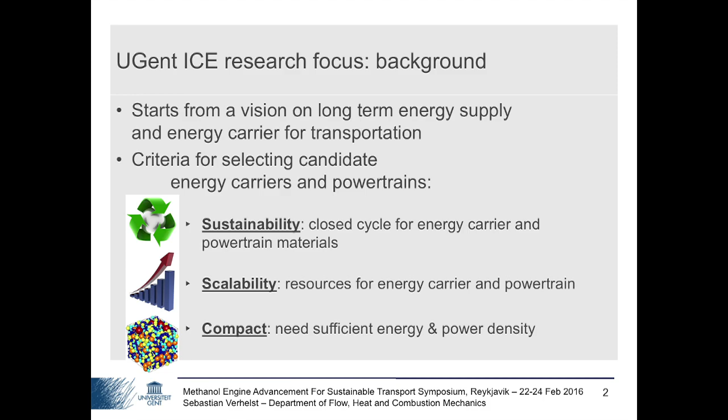That in itself obviously is not enough. We think a very important one that's often missing in a lot of studies is scalability. So if you think about the current challenge for transportation, worldwide we're talking about over 1 billion vehicles these days, so a tremendous challenge. So you always have to weigh your probable or possible alternative against scalability.

Look at the resources that you need, for instance, to produce your energy carrier. Look at the resources that you need to produce the powertrain. Can you scale that up to those huge numbers? If you have to rely on a scarce resource, there's a no-go there. So scalability is also a very important issue.

And then third, of course, there are a lot of other criteria, but this is the base set we started out with. We're talking about transportation, so we need the energy carrier to have high energy density. We need the powertrain to have high power density in order to power transportation. So taking these three criteria, what did we end up with in terms of truly sustainable transportation?

We think the answer lies in obviously renewable things, but renewable fuels, and preferably liquid fuels. So renewable could be from solar. That's our main sustainable energy source in the long run. Of course, it depends on where you are around the world, what you're going to rely on exactly. But so say solar fuels, liquid electricity, as we've already heard mentioned.

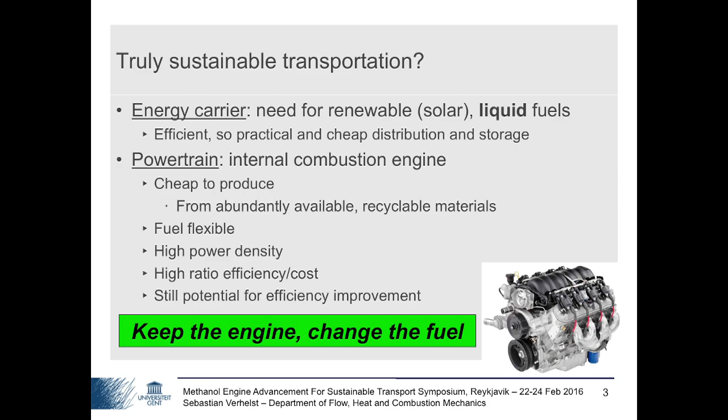So what about that fuel? Well, we've heard a number of times today the case for methanol being presented. So I'll just quickly go through this, not going into any detail here. We've heard that methanol is a very versatile energy carrier, can be produced in different ways. So although it's primarily being produced from fossil fuels as of today, there are also routes based on biomass, based on wastes, and ultimately, in the long run, of course, a really attractive option is to synthesize it using renewable energy, where you see possible schemes depicted over there.

And again, reiterating that it's liquid. So you can rely on cheap tanks that you can place anywhere you like, for instance, in a vessel. You have a cheap way of distributing this energy carrier. Also very interesting is the fact that it's not only miscible with gasoline, it's also miscible with ethanol, which used to be the most prevalent alternative fuel for passenger cars until it was passed by methanol actually recently.

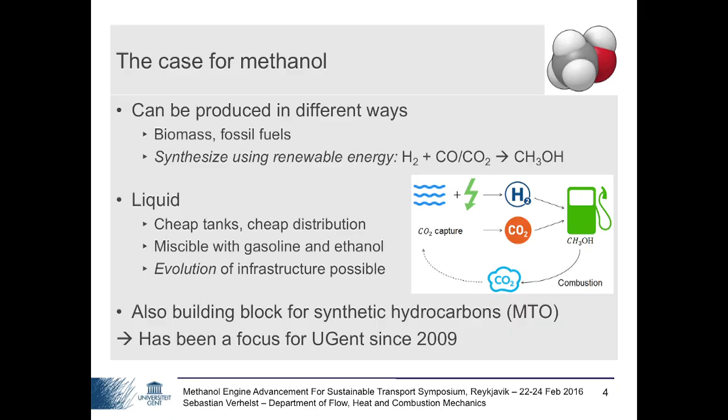And those two things combined mean that you can really work on an evolution of the infrastructure. We were relying on a liquid fuel infrastructure. Right now we're using a number of fuels already. So we have inroads to start introducing methanol. And options like these GEM fuels mean that you have drop-in fuels, that you have vehicles out there that are already able to take on this methanol-containing fuel.

It doesn't stop at being a fuel. It also serves as a building block for more complex hydrocarbons through the methanol to olefins process. So it's really a compound that can serve a lot of needs, which I hope explains why this has been a focus fuel for us since 2009.

And it's really heartwarming to see this big show up, and thank you again for being invited. It's really nice coming from 2009 and having the feeling a bit of being a lone warrior in, at that time, the methanol engine world, and having to explain myself everywhere I went why on Earth we would be looking at methanol, up to this moment where every 3 or 4 months there's a new gathering around methanol engines. So that's a really good thing.

So coming now to the actual topic of this presentation, methanol as an engine fuel. We've already heard a number of methanol properties being really interesting as engine properties. Much of the differences compared to gasoline are determined by methanol's polarity. So just a few examples here. The higher heat of vaporization, for instance, we're talking about 3 times as much for methanol compared to gasoline on a mass basis, and this is amplified in the engine because of the reduced air-to-fuel ratio.

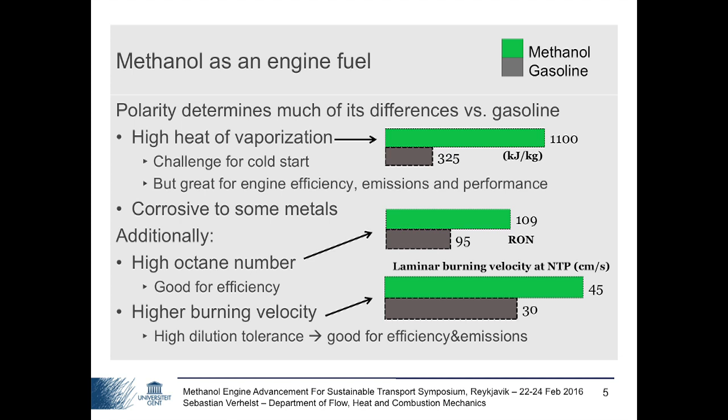But also that usually means that you have more tolerance to dilution. So you can go to lean operation, you can start blending in exhaust gas with the fresh mass, which both mean, again, that you're doing good things for the efficiency and you're lowering temperatures, so you're doing good things for NOx emissions.

So we did a number of measurements. First of all, we wanted to find out the potential in what you could call the world standard gasoline engine, which is still, as of today, the port fuel injected gasoline engine. So what happens if you convert such an engine to allow alcohol operation or methanol operation? We converted 2 engines and started measuring just with a simple conversion what we got in terms of efficiency.

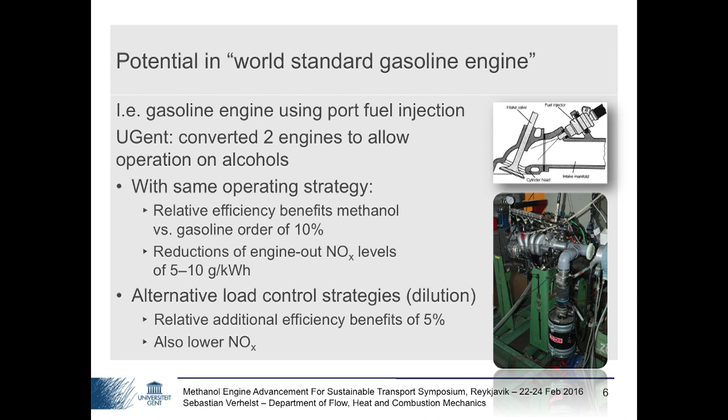While using the same operating strategy as the baseline gasoline engine, we already obtained relative efficiency benefits of methanol versus gasoline of the order of 10%. And more importantly, perhaps, reductions of engine out NOx levels of the order of 5 to 10 grams per kilowatt hour engine out.

If you take advantage of the increased dilution tolerance of methanol compared to gasoline and start pushing a bit more, just playing around with the software, so same hardware, but playing around with strategies, that allows you to get relative additional benefits of the efficiency of the order of 5%, and again, you end up with lower NOx emissions. So that's for the port fuel injected base gasoline engine.

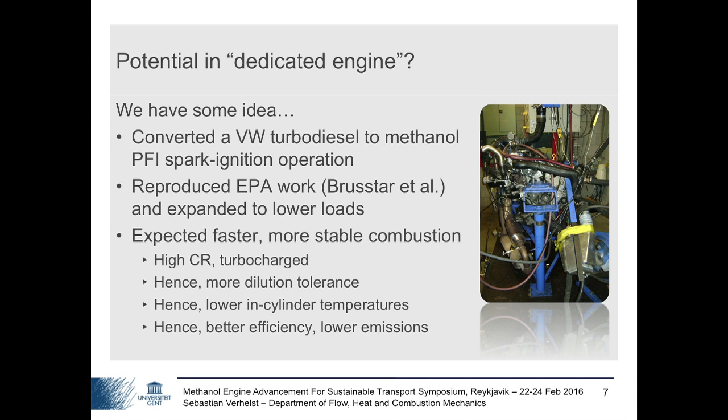What would be the potential in a dedicated engine, an engine that makes better use of these particular properties of methanol? We have some idea. There's still a lot of work to do there, but what we did was, while taking inspiration from work at EPA by Matt Brusstar, to convert a VW turbo diesel to methanol port fuel injected spark ignition operation. So we took out the diesel injectors, replaced them with spark plugs, mounted methanol injectors in the intake manifolds, and that was pretty much it.

So we didn't touch the compression ratio, it remained at the original 19.5 to 1, didn't touch the turbocharger. And so we first of all wanted to reproduce the EPA work because we were quite impressed with the numbers they were getting, but we also wanted to expand that to lower loads, because we then wanted to use the measurement results to feed into vehicle driving cycle simulations.

So why would this engine make better use of methanol's properties? Well, we expected a faster and more stable combustion for the high dilution strategies, because it's, as I've said, a high compression ratio engine, turbocharged. So overall temperature levels are higher, which should boost the tolerance for dilution. And overall peak temperatures would be lowered as a result of that, and we were hoping for better efficiency and lower emissions. So what did we get?

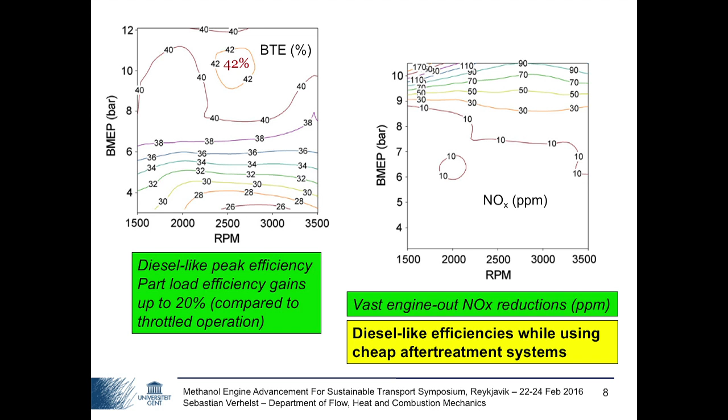So the bottom line here is that you can obtain diesel-like efficiencies while using cheap after-treatment systems, because this engine is still operating at lambda 1, but using EGR. So 42% in itself perhaps isn't as impressive as the numbers you've already seen from Martin, but remember, this is a really straightforward, low-cost conversion, not much optimization going on, and already you're attaining the same or even higher efficiencies as the baseline diesel. So that's an important message, I think.

So what's the potential in state-of-the-art gasoline engines?

We've talked about PFI engines. What about if you go and look at direct injected engines? Well, we cooperated with the Argonne National Lab in Chicago. We tested their DI, naturally aspirated engine in the lab, on methanol, on gasoline, on ethanol, butanol, E85 and M56. You might remember that this M56 blend is a binary blend that ends up having the same air-to-fuel ratio as an E85, which means that this is a fuel you could potentially introduce in a flex fuel vehicle without the engine control unit realizing that it's not operating on E85 but actually on M56.

We did use the stock ECU, which meant we had some load limitations because of the lower heating value of methanol. You have to have longer injection durations for a certain power output. So there were some limitations there, but still at low to mid loads we recorded a 2.7 percentage point efficiency increase on methanol versus gasoline, and this increased at high load where you can really make use of the higher knocking resistance of methanol, and in the end we obtained a peak efficiency there of 40%, which given the baseline engine again was quite impressive, and combined with the carbon to hydrogen ratio of methanol translates to a 20% reduction in CO2 numbers compared to the baseline gasoline engine.

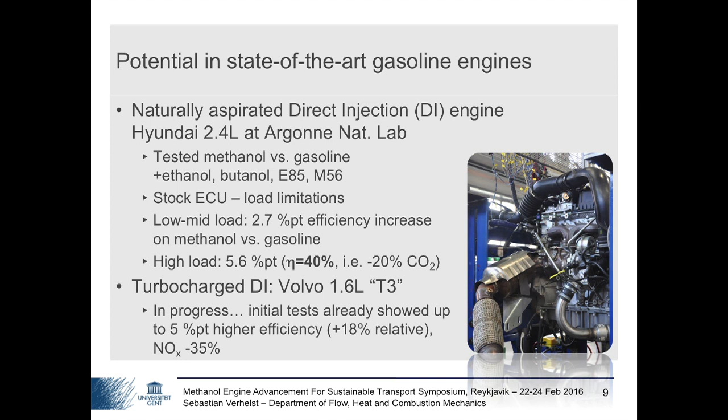We've also just started picking up on the idea that was already briefly presented by Leslie Bromberg from MIT, this fuel reforming using exhaust heat. So methanol is a compound that's very suitable for exhaust energy recovery. So reminding you of the idea, if you look at your methanol tank there, what you could do is make use of your exhaust heat to reform your methanol and end up with a hydrogen-rich gas that has a higher heating value than the methanol you started with, because it's an endothermic reaction. So you make use of the heat that would otherwise be wasted.

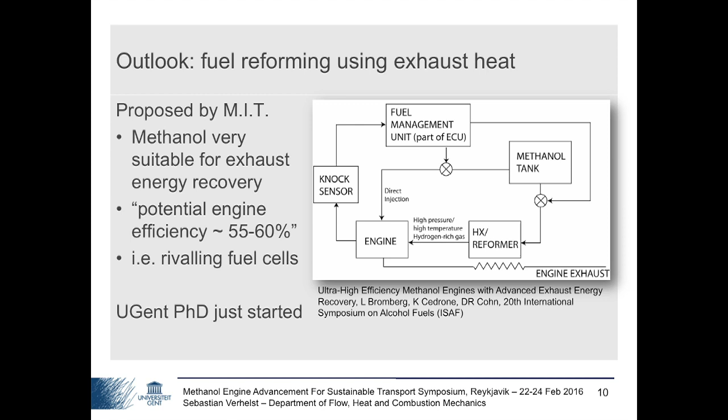And not only that, because it's a hydrogen-rich gas, you can further push these dilution strategies. You can go to leaner mixtures or to higher EGR rates, for instance. So there's a potential for pretty high efficiencies. I'm just reminding you of the figures that Leslie was talking about. So really appealing figures, I would say, which is a justification for a PhD that was just started at Gent, where we are going to try to actually build this thing and see whether we can come up indeed with these efficiency numbers. So I've been talking about SI engines now.

What about diesel engines? We've also recently started work. And Josef already mentioned the Lean Ships project this morning. It's a Horizon 2020 project sponsored within the Mobility for Growth pillar, which is aimed at lowering the energy use and the emissions emitted by the shipping sector. It's a relatively big project involving 46 partners and 8 demonstrator platforms. And one of these 8 demonstrator platforms is called Demonstrating the Potential of Methanol as an Alternative Fuel, which includes 6 partners. So ourselves are leading the work package. We have 2 shipyards involved. We have an engine supplier involved, ship owner, and Methanex is also involved as a methanol producer and supplier.

The main work will be to convert a high-speed marine diesel engine to dual fuel operation with methanol. So making use of a pilot injection of diesel to serve as an ignition source and trying to increase the energy share of methanol as much as possible, methanol being introduced in the port. We've also just heard that this might not be the best approach in terms of efficiency or efficiency versus emissions trade-off. We're fully aware of that. The reason we chose this type of technology is first of all because we want to be able to offer a retrofit solution. We've heard about the importance of that in the shipping industry, and we also want to lower the thresholds of acceptance of possible ship owners, because using this option, you could revert back to 100% diesel operation if you would have any issues with the methanol system.

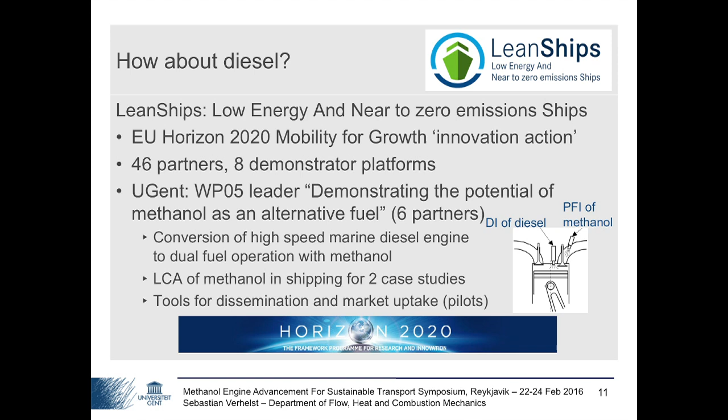So it's more from the viewpoint of acceptance and introduction in the market that we've picked this technology. We're going to include a life cycle assessment of methanol in shipping for 2 case studies that we've selected to make it a bit more concrete, to come up with actual numbers, to try to convince people at the end of the project, because this is also a part of that, to hopefully take this up and hopefully translate this to a number of actual pilots.

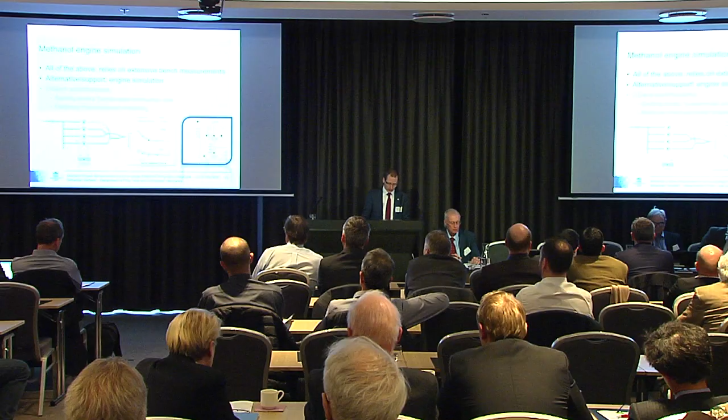Then finally, I've been mostly talking about our experimental work. I just want to share a few words with you on our simulation work. All of these tests that I've just been mentioning obviously rely on extensive bench measurements. The alternative, or at least the part of the replacement of that, could be through engine simulation. So we've been working on supplying a number of building blocks, some fundamental combustion data on methanol and methanol blends, and we've been using these building blocks in so-called multizone thermodynamic modeling. So it's getting a bit technical now, but bear with me.

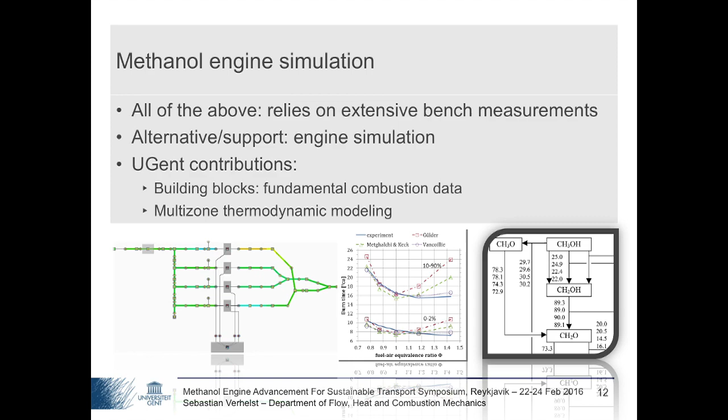So what I mean with building blocks are, on the one hand, for instance, the laminar burning velocity, the fundamental burning velocity of methanol containing mixtures. It sort of groups the chemical effects on combustion, so it's a convenient way of including the combustion properties in any engine simulation. We calculated this laminar burning velocity using a selected chemical kinetics scheme, and then built a correlation that allowed easy use in an engine code, and then went on to validate this through measurements.

On the top right, you see a picture of the flat flame burner at Lund University, where we measured a number of mixtures' burning velocity to validate the correlation, and beneath that you see a spherically expanding flame, which is measurements we did in cooperation with Leeds University. And we did this for pure methanol as well as methanol mixtures. So these GEM blends, we know also how to model them.

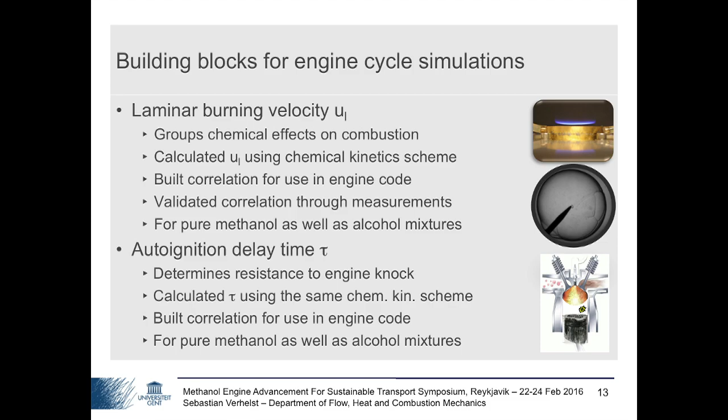Another important property is the auto-ignition delay time, which determines the resistance to engine knock, so it's important to get right. Pretty similar story as with the laminar burning velocity. We did a lot of calculations to build a correlation for use in engine code, and did that for pure methanol as well as these GEM blends or other alcohol mixtures in general.

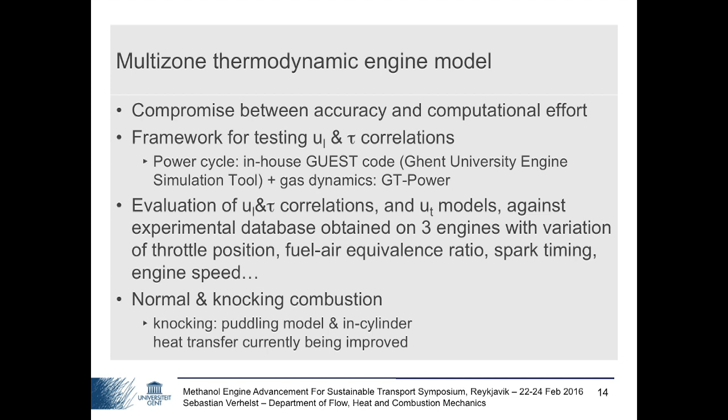And then we looked at multizone thermodynamic engine models, which are sort of a compromise between you want accuracy, but you don't want too much computational effort if you want to use a code to really optimize engines for a different fuel, so for methanol in this case. So we use this as a framework for testing our correlations, where we used our in-house code to calculate through the power cycle, and then used the commercial code to include the gas dynamics.

We evaluated these correlations as well as models for turbulent combustion velocity, and actually the whole experimental campaign I started out with was done to serve as a database for our modeling efforts, but luckily they turned out to be interesting in their own right. But that means that we ended up with a quite extensive database with variations of different engine parameters, and it allowed us to validate these correlations. So we looked at normal as well as knocking combustion, where for improved predictions for knocking combustion, we're still working on improving the puddling model as well as in-cylinder heat transfer.

So to conclude, I think the case for methanol as an energy carrier has been made, but additionally, methanol is a great engine fuel. It allows increased performance, increased efficiency, and decreased emissions. So actually you end up with the potential for efficiencies exceeding those of diesel engines, with the low emissions of gasoline engines, and with greater performance than both.

So pretty compelling story. We have already partly confirmed this potential in engine testing, where we're planning more tests on the GDI engine and on the reformer setup. And we're also working on supporting this by engine simulation to accelerate this experimental campaign. So I've talked about the contributions to the building blocks and the initial demonstrations of predictive engine cycle simulations.